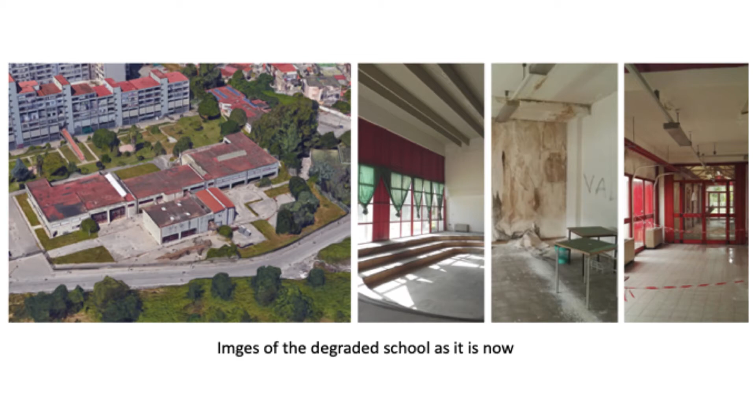The project consists in the refurbishment of an abandoned school situated in a degraded neighbourhood in the outskirts of Naples. The school building has been assigned by the Municipality of Naples to the association Maestri di Strada, and the usage agreement stipulates that the association should provide an adequate energy renovation and revamping of the building.

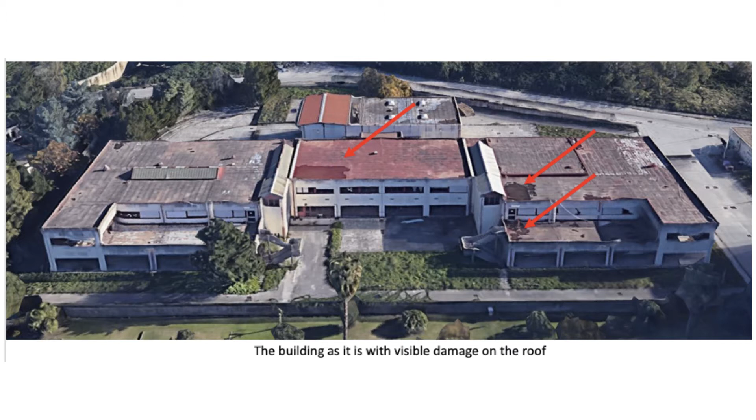Maestri di Strada is a non-profit association of professional educators who have the mission to reduce early school dropouts and to facilitate the insertion into society of young people at risk of social exclusion and poverty. Currently, the property is not functioning because of significant damage to its structure, mostly due to water infiltration through roofs and terraces incapable of draining rainwater properly. The building is completely flooded and in an evident state of abandonment.

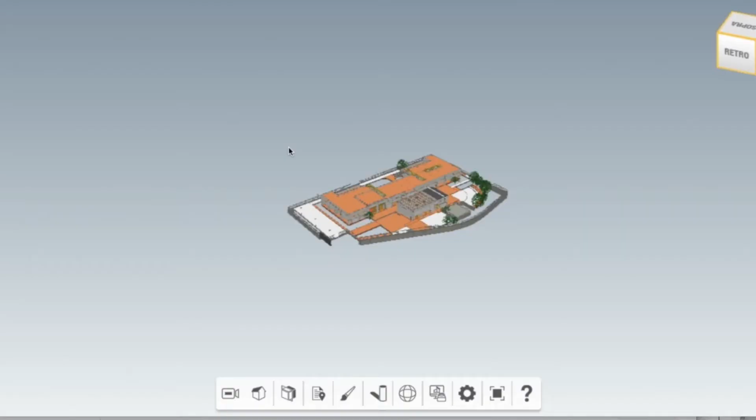In 2019, Maestri di Strada signed an agreement with IBIMI, the Italian chapter of buildingSMART International. A few members of IBIMI volunteered to participate in the renovation of the school and offered to model the existing building for different BIM uses. This modelling project started from a master thesis on energy requalification, and it has now turned into a pilot project for future energy renovations and upgradings of structural security for thousands of schools in need in Italy.

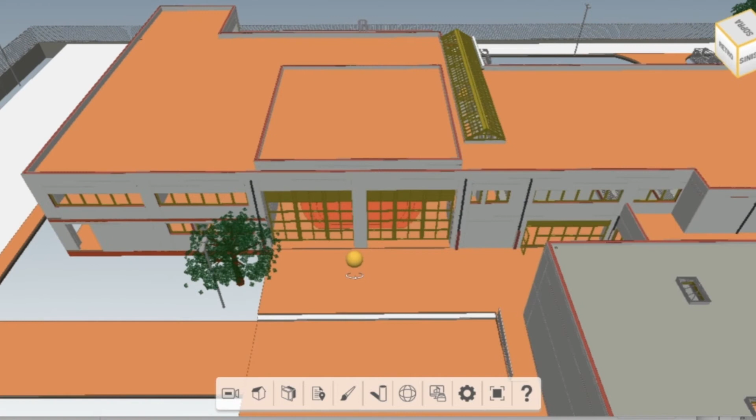This school is, in fact, an inspiring case study for the Ministry of Education and the Ministry for Southern Italy, who went to meet Maestri di Strada to learn about the innovative technologies applied, and they are evaluating the possibility to implement them in a large scale of renovation works. A difficulty to overcome was the necessity to redraw all of the plans, elevations and cross-sections of the school that got burnt in a suspected arson.

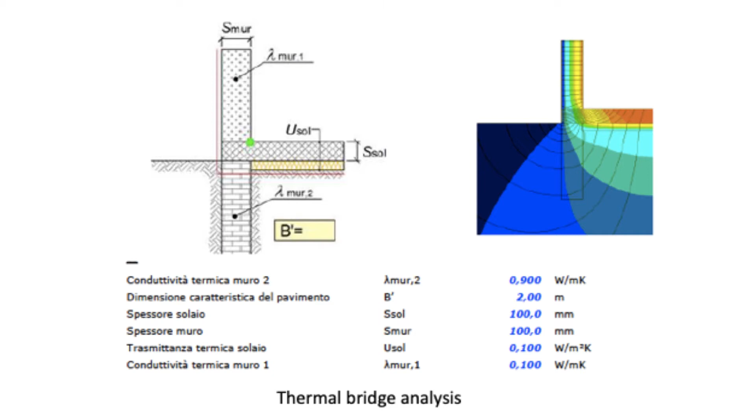The first contribution to the modelling was given by Tamburi SRL that developed the point clouds of the building and the annexed area through a scan. ACCA Software has provided the common data environment to allow the different professionals to collaborate on the same platform. Two young architects from the University of Naples Federico II entered the information regarding the different items needed for the building. However, it was not possible to insert values for the thermal bridges, as it is the result of analysis of the sources of dispersion and problems of condensation that cause mould and unhealthy environments.

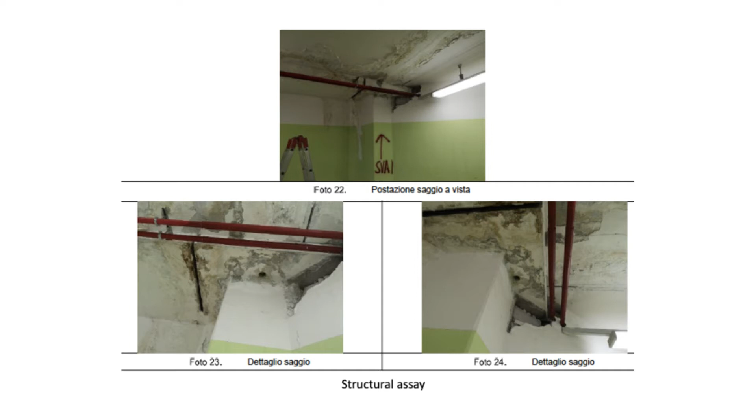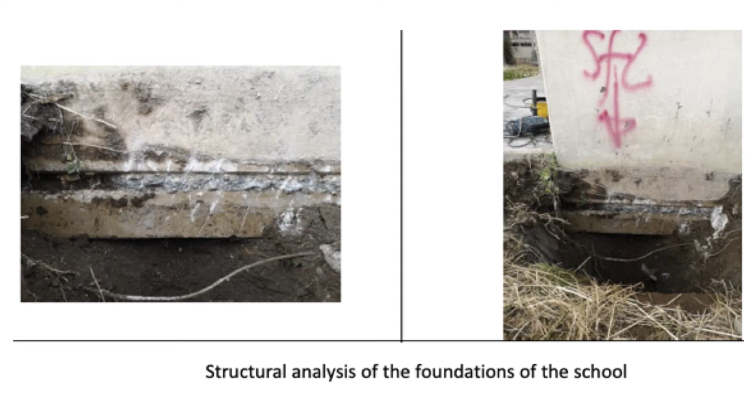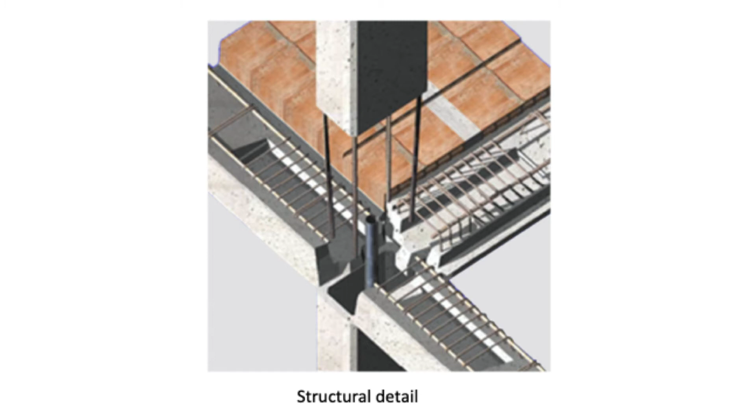Because of the lack of documentation, the structural solidity of the building was not known, which is located in an area at high seismic risk. It was hence decided that ETS SRL would carry out an inspection to identify all the critical points through the IFC model, which were then examined and shared on the ACCA CDE. The result of the inspection confirmed the use of prefabricated reinforced concrete elements and the presence of pillars made on site for the assembly. This verification was helpful also to confirm the possibility of installing photovoltaic panels that ANEA donated to the school to produce its own electricity.

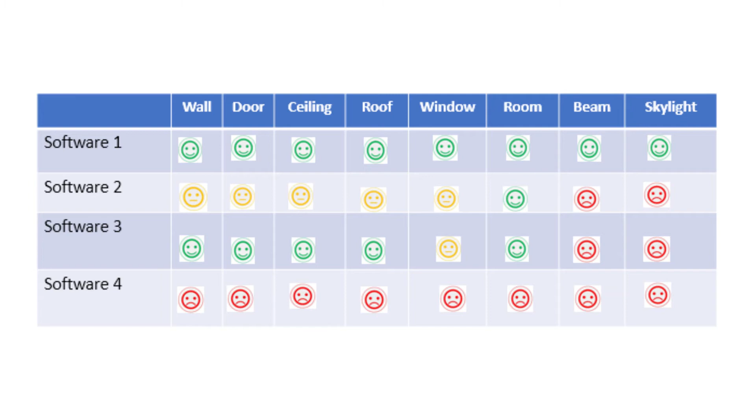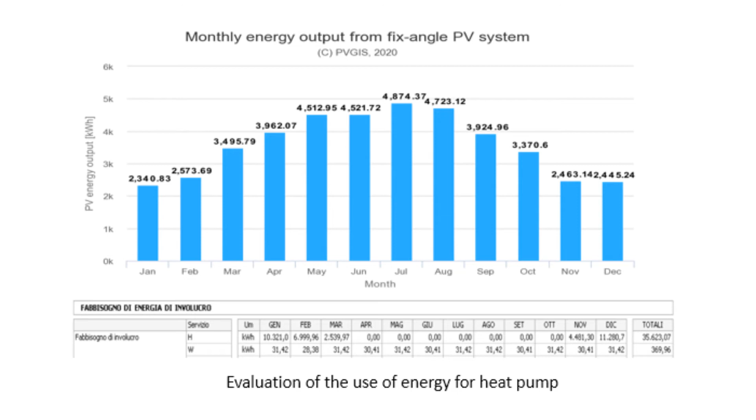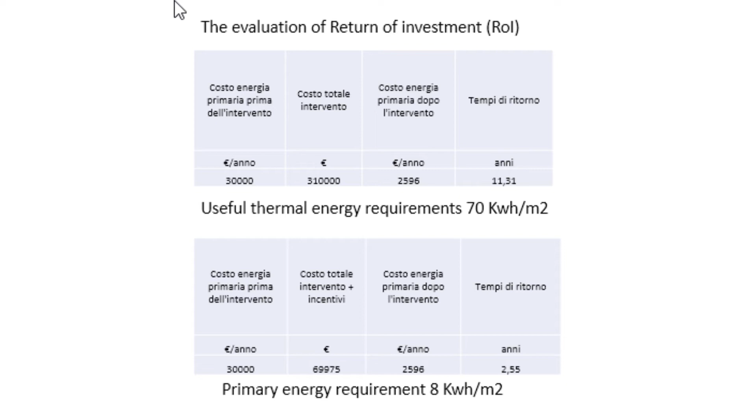At this point, it was possible to compare results among different softwares. The study focused on the problems of exporting the Graphisoft IFC file on 3 different energy simulation softwares. The best performing software resulted to be Termolog. However, it only reads the DWG obtained from the BIM model. Termus, on the other hand, reads the IFC directly, while CYPETHERM showed problems reading IFC 2x3, while it seems to have no problems with IFC 4. The main import problems in the energy software concerned the curtain wall elements, skylights, pillars and a pitched roof. The energy analysis led to the identification of an E energy class, leaving a large space for improvement.

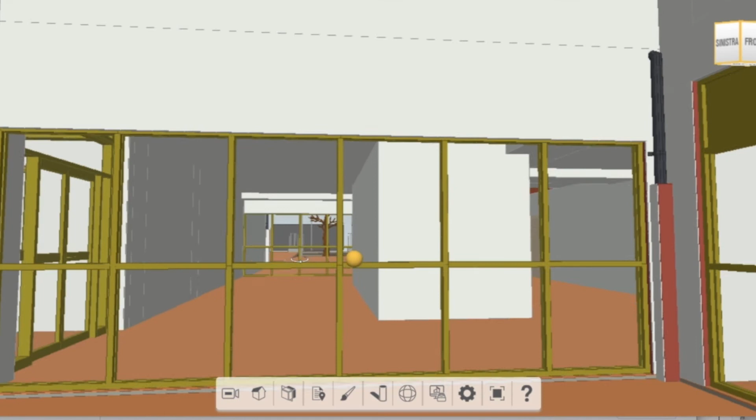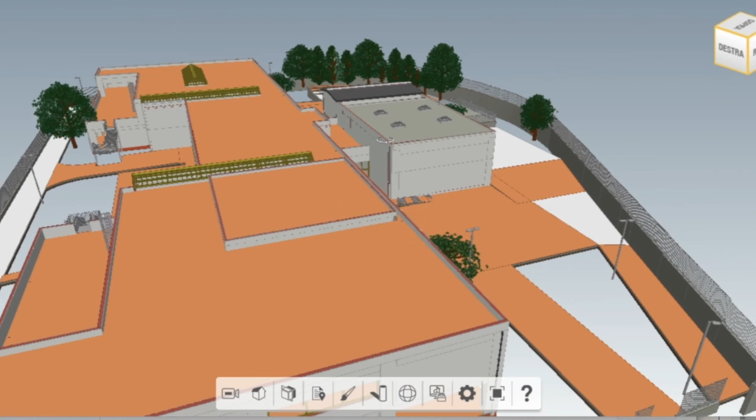IBIMI and Maestri di Strada organised a workshop in order to determine the requirements for a Class A building, also thanks to a smart usage of BIM technologies that would also ensure economic sustainability. The initial situation consists in an excessive heat dispersion during winter and high heat and humidity levels during summer. It was assessed by the different working groups that the use of photovoltaics integrated with heat pumps could meet the energy needs. The prerequisite is an improvement in the insulation of the roof and the replacement of the fixtures of windows that cover most of the external walls.

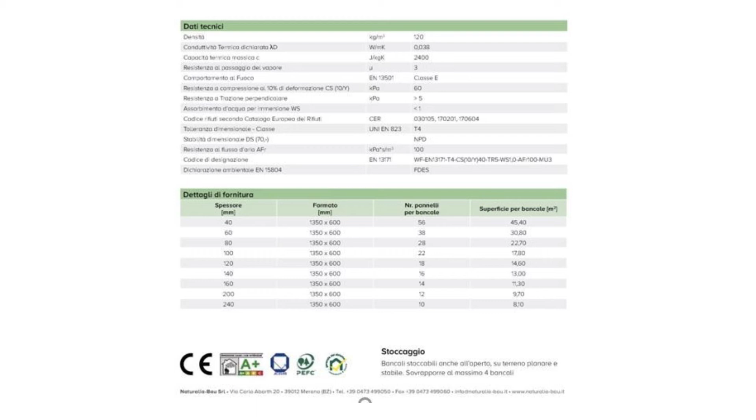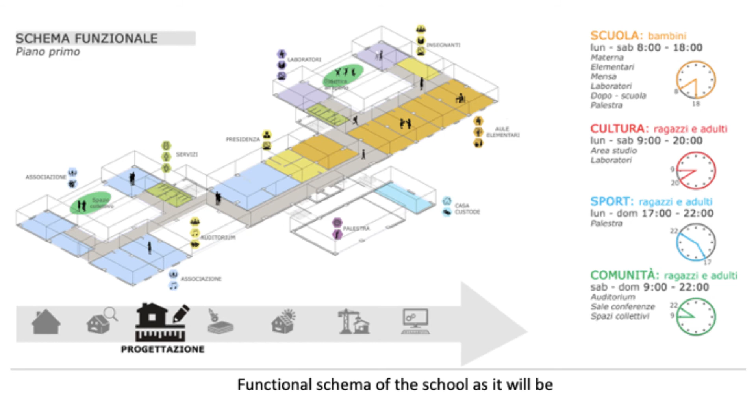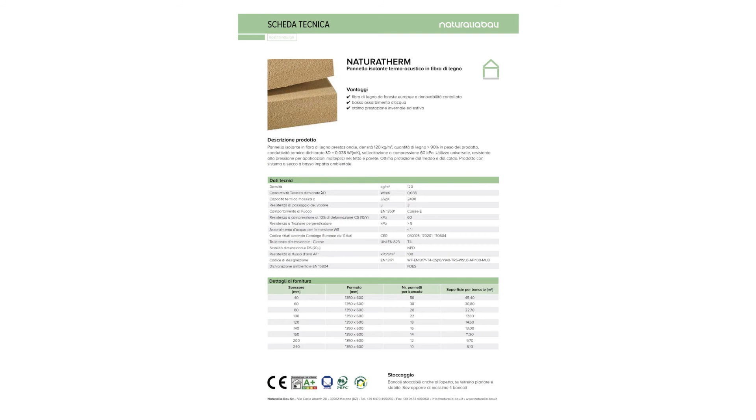The use of BIM for maintenance, BIM 7D, entails that all the technologies identified for energy requalification, once installed, are represented in the BIM model with all their technical data sheets. This permits to define a preventative maintenance plan as well as to intervene promptly in case of anomalies. Thanks to the existing modelling, during the workshop, educators of Maestri di Strada identified the uses of main working areas, which allowed to make simulations and evaluate the optimal energy measures for the different parts of the school, according to their HVAC needs. Global Power Service carried out a market investigation and chose a thermoacoustic insulating panel in wood fibre to be installed on an inclined reinforced sheet to guarantee good insulation during summer and stop the infiltrations of water.

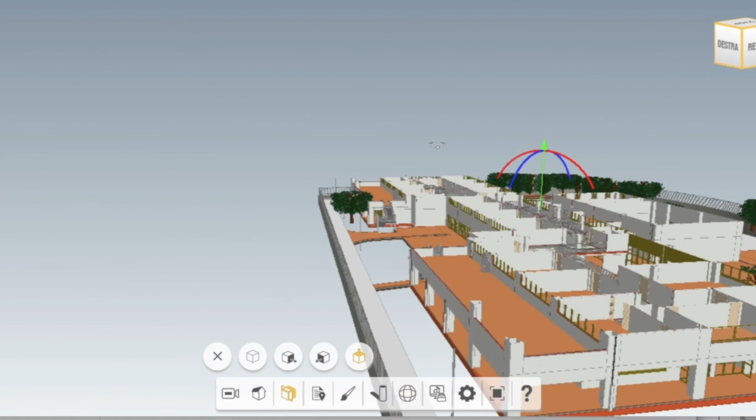A truly innovative use of BIM for Maestri di Strada will consist in using the BIM model as a tool for self-construction training. For this reason, it is useful to collect in a single common data environment all of the studies undertaken and decisions made, both on site and remotely. This report will allow to develop a course for the architects and engineers who will be able to see what has been done both in the virtual and in the real environment.

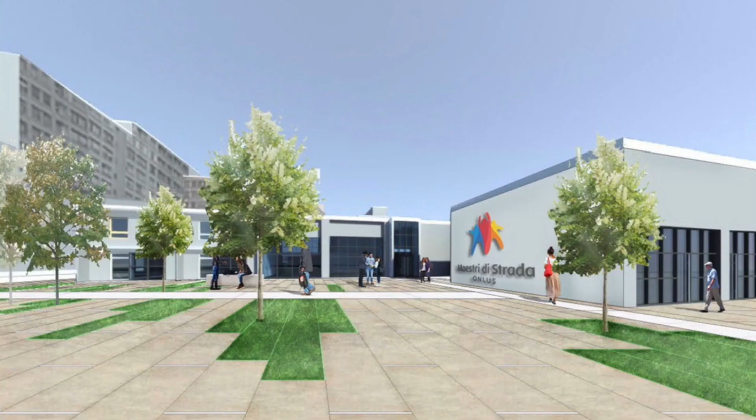The establishment of a welcoming multi-purpose centre in the middle of such a problematic neighbourhood of Naples will hopefully motivate many more local students to attend the school. Schools and classrooms will soon be available to visit online, which will contribute to the promotion of the activities and to attract more interest. This would subtract many of them from local organised crime, which is the ultimate objective of Maestri di Strada.